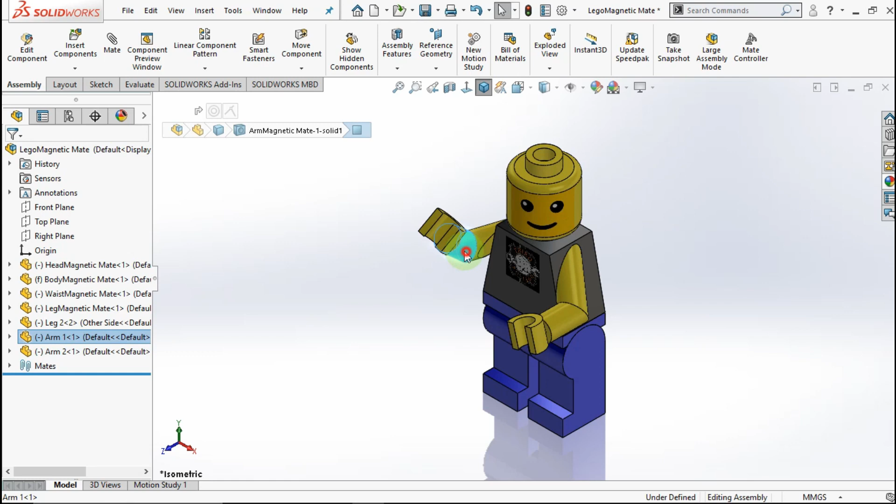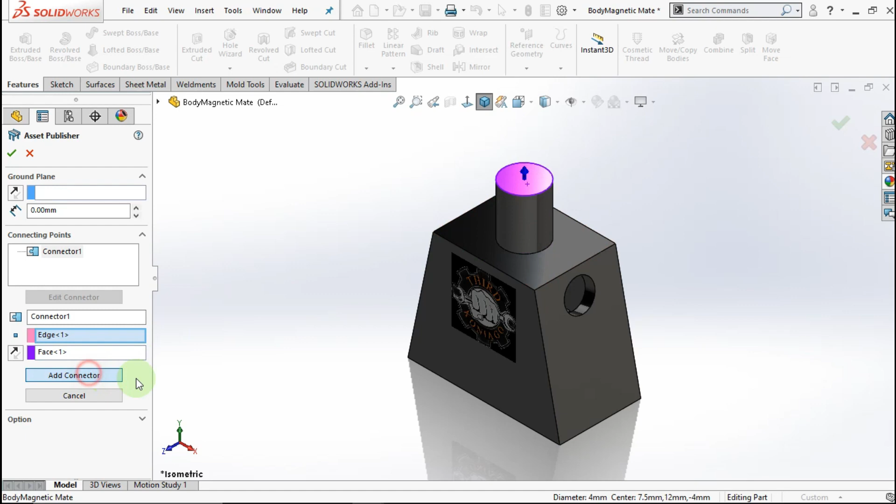Now go to body. Go to tools, activate asset publisher. Click this edge and click this face. Click add connector. Do it the same thing until connector five.

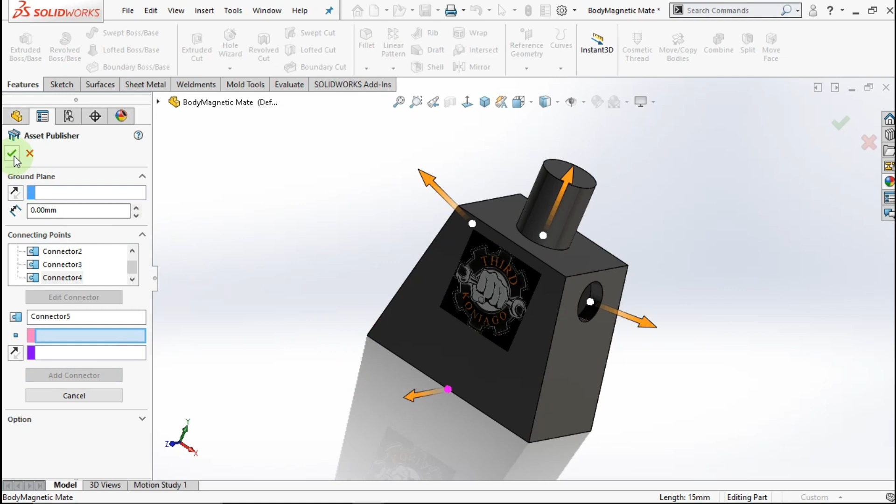After done, go to assembly again. Go to head Lego. Make connector to this part, like this.

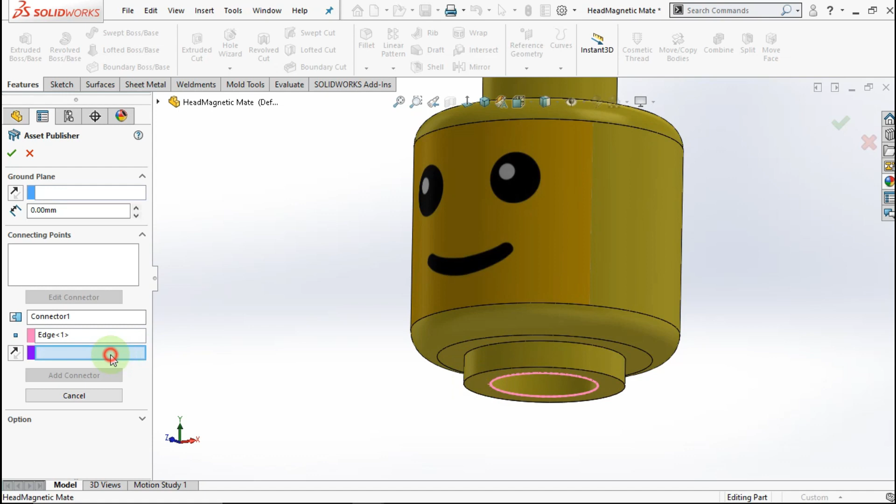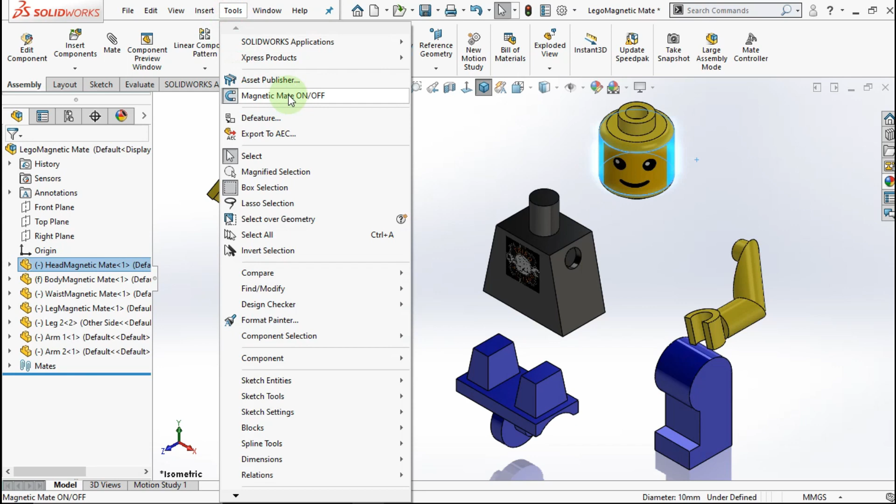Go to assembly again. See? Make sure you activate the magnetic mate. Drag head to body like this. See? You can do like this. See?

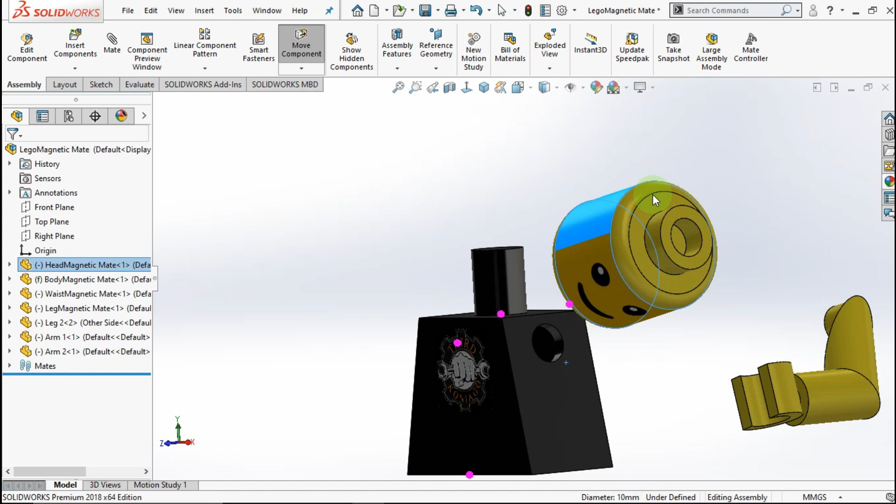Now make connector to this arm Lego. After that, drag arm to body connector. See? That makes easy mate.

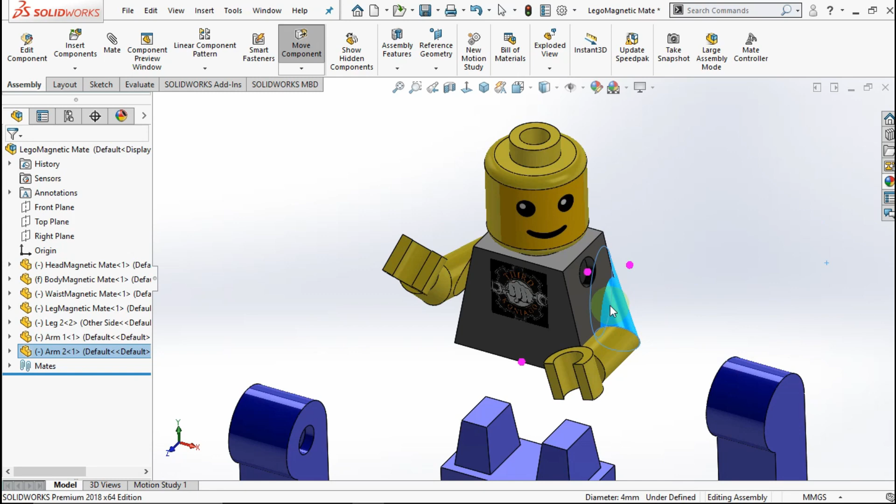Now make connector to this Lego leg and waist. Drag leg to connector waist. See?

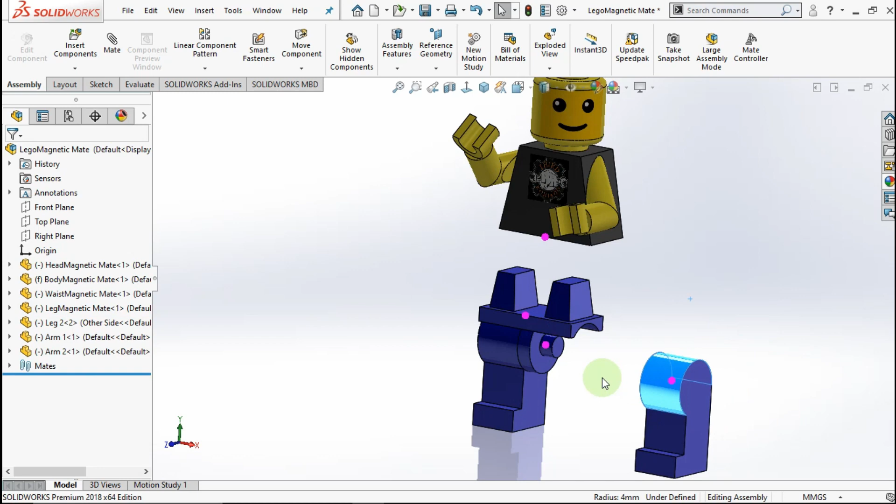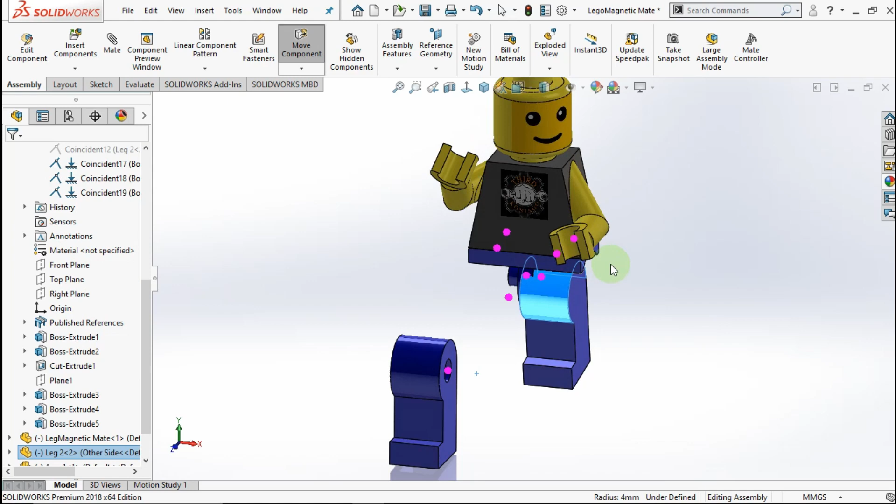Drag waist to body connector. I don't know how to fix the magnetic mate body with the waist. For now, I'm using mate as usual. See?

Now you can separate it and connect parts easily. So what do you think, will this feature make your assembly faster or not? Just comment in this video.